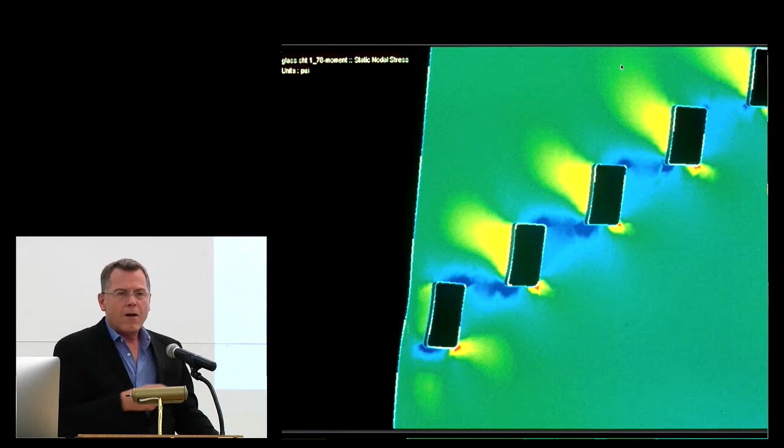Nordenson designed the stair cantilevered in stainless steel, aluminum, cables, laminated glass, and finally pushed through in his office a level of finite element analysis, the structural analysis of making this stair operate with glass as a structural member.

Guy Nordenson had a major role in a series of conferences that we organized at Columbia over these 7 years. And one of the issues that we were looking at was the relationships between very sophisticated forms of engineering and computation and the way these, on one hand, were enabling new modes of design, such as that elaborate stairway, but also the degree to which through the capitalization, the funding, and the different strata of economics within which they occur, they were relatively held in a tight province where they don't drift into the wider architectural landscape.

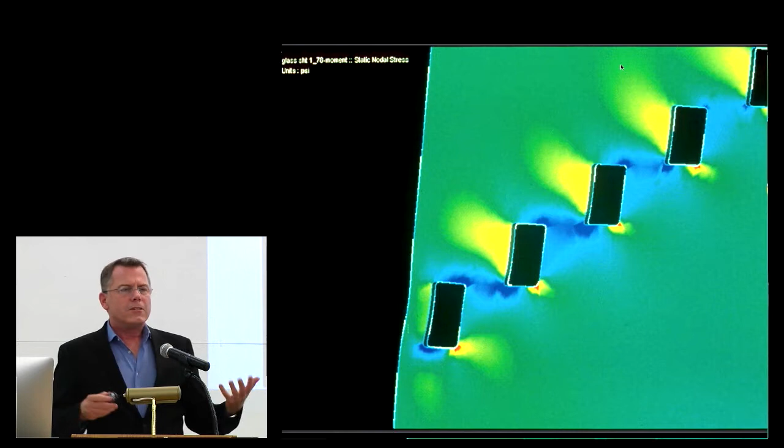In the context of Guy Nordenson's stair, the question starts to be, and I think has persisted for a long time, how does architecture and its goals that are often highly aspirational in terms of material engineering, social issues, humanitarian issues, questions of empathy, how do all of those questions as we manifest them in our relatively discrete and small practices come out into the world and through what pathways? Certainly many of us end up frustrated when we're in practice about what we believe is possible versus what actually happens.

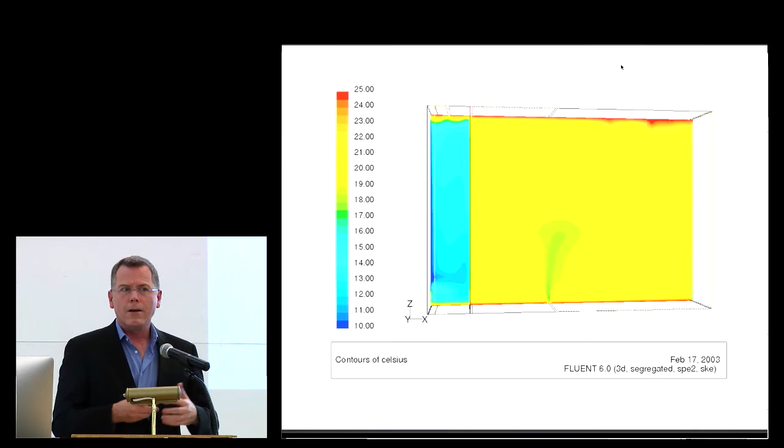What people might not realize about the Toledo Glass Pavilion is what preceded its formal design. Sejima likes to say she felt sorry in a way that people thought she was an heir to Mies van der Rohe, and that they didn't understand what was really occurring in her work, that reflection was at some level superficial and difficult to bear on her part. But what people don't know about the work is that what preceded the design, in fact, was a thermal analysis by the environmental engineer Matthias Schuler in Stuttgart and Munich.

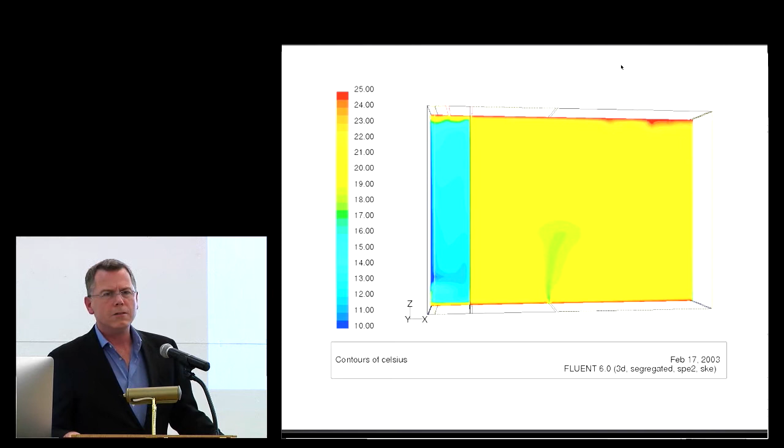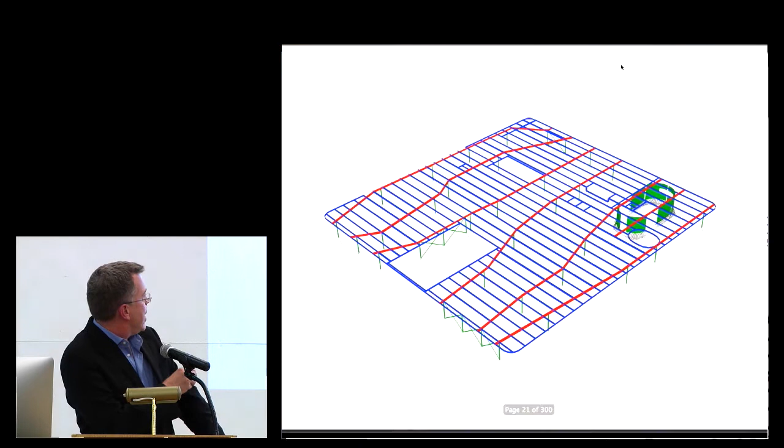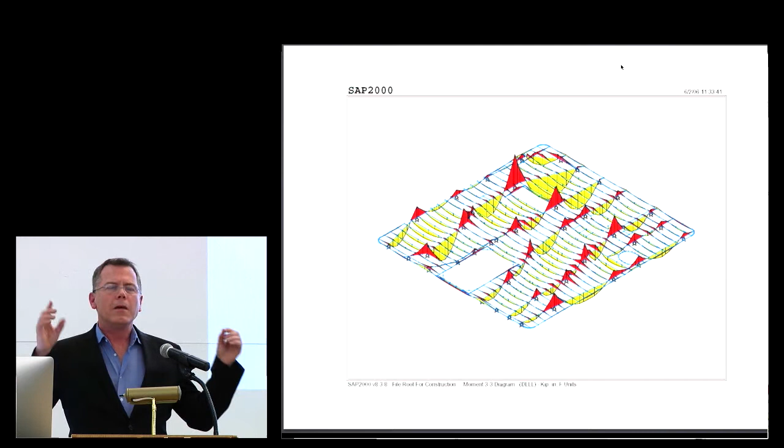Similarly, work on structure by Guy Nordenson, analyzing the deflection of beams. That is a 3D model of the roof structure. That is the stress and strain in the beams. The spans of every roof beam are different in this building because of the column structure placement. Each beam has a different deflection that is counteracted by a different camber in the beam next to it. So where you see the red, beams are pushing upwards. Where you see the yellow, they're pushing downwards.

We could go into this in great detail, but if you look at the work by SANAA during that period of time, you, on one hand, see the evidence of the building as a visual instrument. It's a glass building. It's about transparency. It looks like Mies van der Rohe at some level. It is part of a 20th century tradition of optics, visuality, seeing.

But on the other hand, as a contemporary building realized in the middle 2000s, it was also a building that was pushed through a level of computational analysis in structure, in energy, in physics, that pushes it into a completely different experiential level architecturally. Frank Gehry's IAC building was part of the first conference.

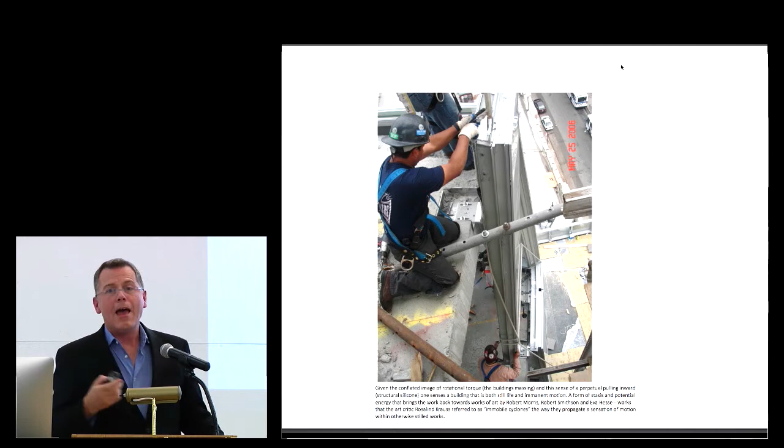What many people don't know about the IAC building is that this is not a building made of cast curved glass. The glass in the IAC building, and these are IGUs, 2 layers of glass, arrived on site flat and was actually cold bent into place. So this is an image of the glass being installed. The men are actually in a process of partially setting it up and then eventually bending it into the space to produce the curvature.

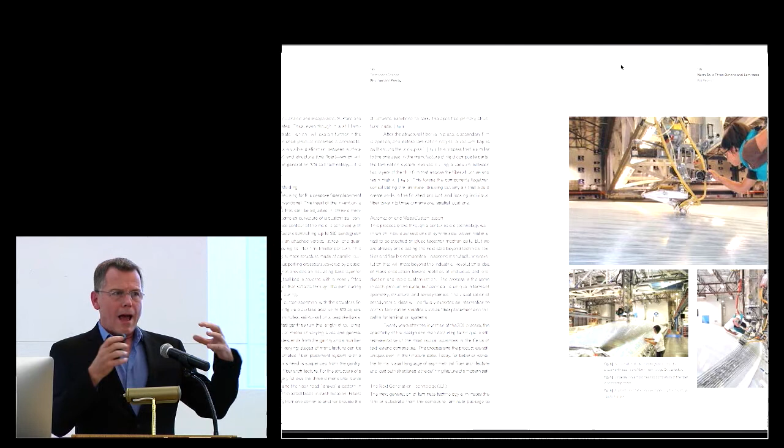Looking at these kind of things, I think a question that comes to mind is, on one hand, how do we operate as designers? When do we get access to this type of materials knowledge? When do we get access to this type of technology? Increasingly, it's embedded in relatively low-cost software where you can do these things in a classroom with relatively little training.

But at the same time, when do we begin to conceptually try to imagine the bridge between something produced in some way that's complex economically, materially, technically, and what it produces in the world, and where that lodges itself as either an expensive, high-end piece of architecture, a $100 million building on the West Side Highway in Manhattan, or a low-income house in Houston. Where is the strata, and how do these things start to come together, if they do at all? The general assumption is they don't, and I'll try to say that they're not coming together like they should.

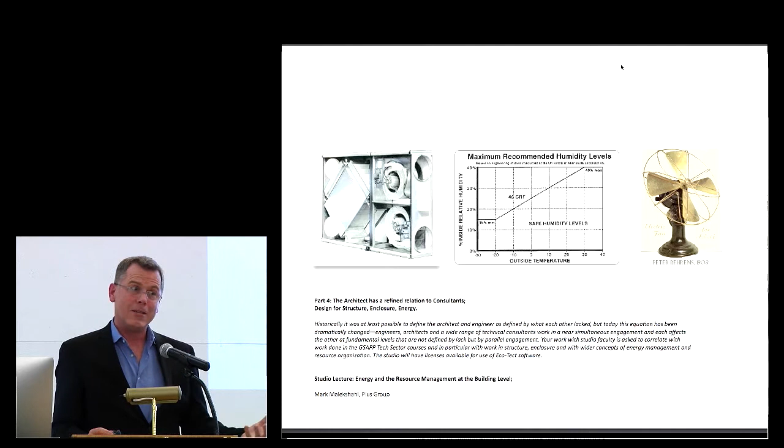Polymers, this is North Sails outside of Las Vegas, carbon fiber laced sails for America's Cup races. François Roche, based in Paris, a polymer tent. This is, I believe, in India, a polymer tent that is lifted by an ox. François, looking at the contemporary molecular aspects of the polymer versus one of the most ancient forms of humans harnessing power larger than themselves to dilate the structure and produce an architectural interior.

Now, if you look into history, you would assume that the 20th century, whatever part of it you're looking at, would have a deep relationship to architectural technologies, and of course it generally does. But the differences are worth looking at very closely and reviewing now versus 1970 versus 1940 versus 1930, different places, different times, different people.

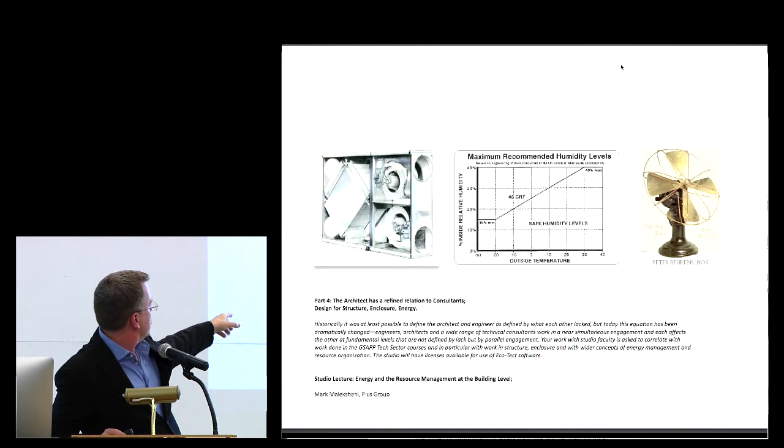In Kenneth Frampton's Critical History of Modern Architecture, actually I take that back, that's a different reference. In Frederic Schwartz's book on the Werkbund from about 10 years ago, he's discussing Peter Behrens' designs for AEG, the large industrial concern in Germany from 1880s up until today. AEG designing everything from turbines for power plants to fans for your home. Behrens, according to Frampton and Schwartz, was not concerned with how the fan worked, but with how it looked.

And if you go down that history, it's not to say that how it looks is trivial. It, in fact, becomes philosophically quite complex. But the argument is that somebody like Peter Behrens, when he was designing machines for AEG, not buildings, but machines, was interested in giving them what Schwartz calls style, and style as a quality that supersedes the commodity role. He wasn't interested in the electric motor. He wasn't interested in the copper wires. He wasn't interested in the brass versus the steel, other than in the optic quality, the argument goes.

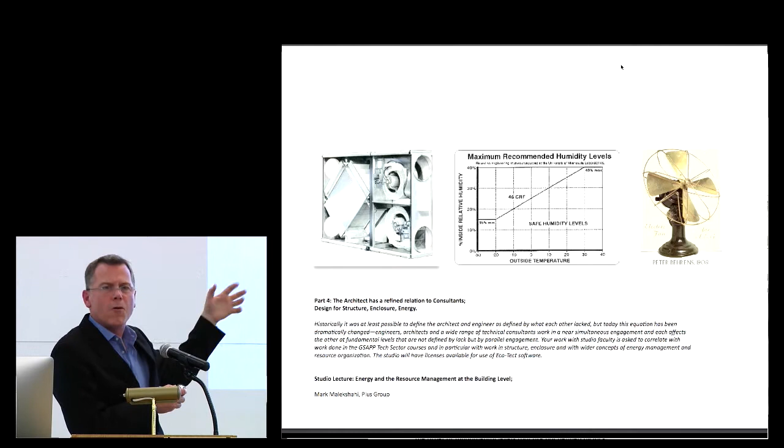Now, today, buildings have machines in them galore. This on the left is a contemporary machine. It's called an HRV. It will exchange the air in your building and replace it with air from outside. But these kind of machines have nothing to do with architectural scrutiny. We buy them, we use them, we generally install them in a place where they won't vibrate or make noise for the other rooms, but they, of course, are what make buildings possible. The Toledo Glass Pavilion has a whole slew of those in the basement to exchange the air so the building doesn't condensate.

Now, when you come to these kind of scenarios today, and I don't mean to be speaking to an audience who doesn't know this already at some level, of course, you're young, the world is modern, you will do things in a way that you wouldn't have to fight your way to this point.

You might just start at this point because you're young and you're right there already. But historically, the way in which architects gather this information and use it has been a bit of a different path. The architect comes up with a concept, a complex idea for a city, for a site, for a client, for a goal, and then after that starts to be presented and organized and under control, you begin to hire what are called consultants, people that help you solve all of these problems. And if they're great consultants, they help you refine your project, of course.

But I think what's going on today in so many of the buildings that we were looking at in the conference and series of books was that the quote-unquote consultants were there on day one, and that what was going on conceptually in the project almost required the quote-unquote consultant to help you understand something thermal, material, chemical even, before you would have the right design aspect.

Now, I'll come back to that, but my way into this was really not through materials, even though I was raised in a generation that valued tectonics and construction by various influential theorists and historians, such as Kenneth Frampton. But I came at it really through housing. And this is kind of tying into Eric's introduction.

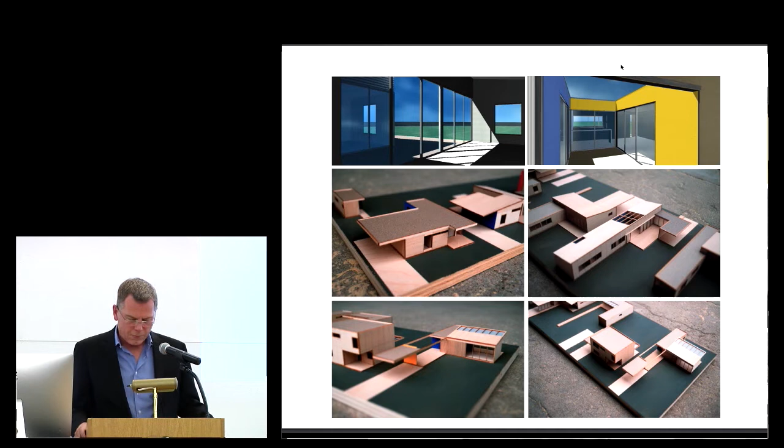So 16 architects ended up being invited to design a house for the Fifth Ward Community Redevelopment Corporation, who had been building the house I showed you a moment ago, very successfully, helping a lot of families get settled and become property owners. But they were interested in exploring it, and they also felt as if it needed to be explored. The architects were given a dossier of information, many pieces of information, but 3 large pieces of data were right at the front of everything. And they began to work.

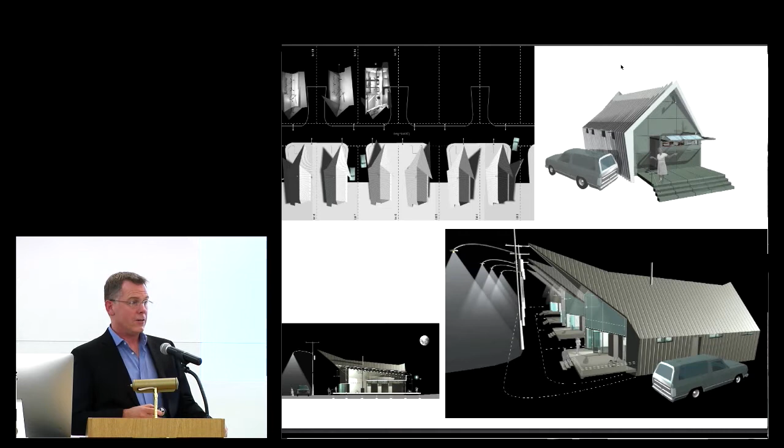Sze Tsung Leong and Judy Chung producing a house that could be assembled, taken apart, and reconfigured over time. Lindy Roy, again, this is 1998, designing a house that actually used the street light to gather light, trying to covet the infrastructure. Her house is a type of lampshade that's capturing the street light. Flow-through ventilation, prefabricated, a whole set of innovative ideas, but a kind of humorous and also serious idea at the same time of what if the house could borrow the qualities of the city-owned infrastructure and you could tap into that type of wealth. So a kind of caricature of that, the lower image showing that.

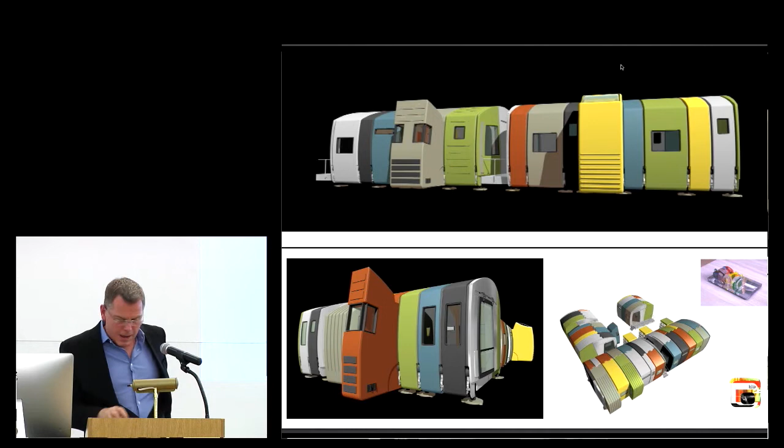Mark Wamble, Dawn Finley, known as Interloop Architects. I'll explain this in depth in a moment. And then my own participation in a house called Glass House at 2 Degrees, which I'll also explain in a moment. Now, I had mentioned 3 pieces of data.

Houston was a potential recipient of large assistance. Houston in the middle 1990s had a very depressed downtown sector. It's called the Inner Loop. Houston is a classic case of all of the wealth moving to the edges and the production of a sprawling city where the real work is on the perimeter. The crash in the oil markets in the 1980s left Houston's center very devastated. By the middle 90s, it had still not recovered. Today, it's largely recovered with quite a bit of housing once the property values dropped low enough to be redeveloped as housing.

But at that point in time, the way in which a city, and still today, would receive aid at the federal level for something like housing was in the form of what are called block grants. And it means that monies that are at the federal level, $100 million, $1 billion, whatever the number is, they are broken down and redistributed to either states or to different levels of municipal government in the form of what are called block grants. The intention is to break down the monolithic structure of the government subsidy and to mobilize it through more local and theoretically more capable agencies.

So instead of the federal government telling Houston what to do, it moves some money to Houston, and then Houston determines what to do. Teaching at Berkeley, Jennifer Wolch and Michael Dear, the dean and a professor of city planning, formerly geographers at USC. In their early research, they argued that by doing that, moving money from the federal level to the local level sounds like a great idea. But in the case of lower income constituencies, it means that you're moving the money to a place that doesn't necessarily have the infrastructure to actually best use the money. You give the liberty of determining the future of the money, but you also lack the tools.

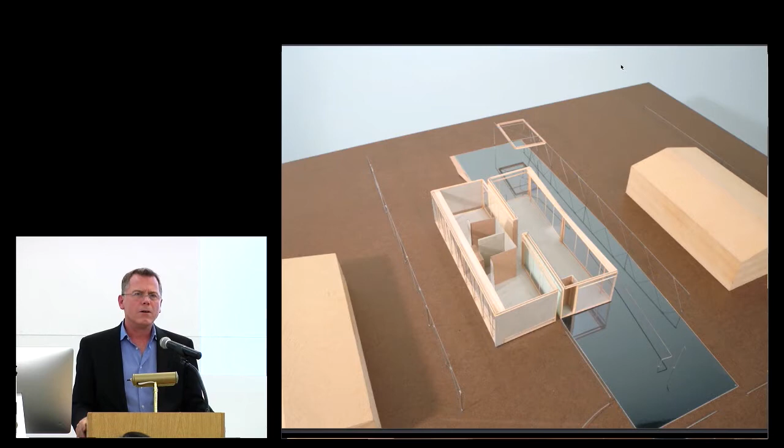What happened over the period of 10 years that I was involved in this work, they couldn't identify 25,000 households because they didn't have the apparatus to find the people who could qualify. So in other words, the Jennifer Wolch and Michael Dear argument kind of proved true in the sense that the money was there, but the instruments to actually locate the people who could use it were not. That is not to say there weren't sincere and profound attempts to do so.

So in that period of time, what sprung up was a handful of quite effective low-income housing developers, nonprofits. What also sprung up was a set of specialists within banks who were intended to find constituents and help identify people that could benefit from this, and then a set of interlocutors who would bring it together. There were literally, during that period of time in the 90s, tents assembled in empty parking lots to have housing fairs where you would have a bank, a developer, and then people that would bring you together and say, you know, you could have a house instead of renting an apartment.

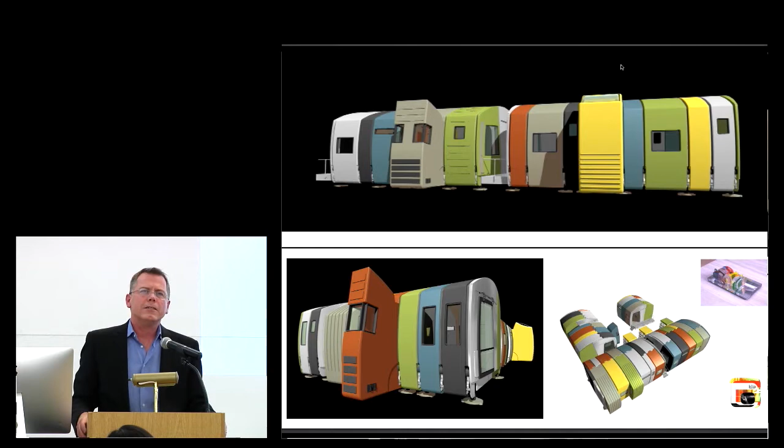In that context, the $225 million was often seen as a big number. In the context of Houston's budget in 1998, everybody worked with numbers then, and we still often do, of course, within schools of architecture. The city had commissioned about $1.4 billion in freeways. One 8-mile stretch of freeway cost $181 million that year. So $225 million as a large municipal number is, of course, tiny. Freeways produce wealth, housing produces wealth differently, so it's, of course, not a fair comparison. But you keep going and trying to contextualize the value of that money as an aggregate sum versus a disaggregate sum. The drive at the federal level was, and still often is, to help people buy or to subsidize rent rather than to actually build buildings.

If you bought a house in the 5th Ward for $52,000 with a $9,500 voucher, your mortgage of about $40,000 would be about $350 a month. At 9 years, which is the average tenancy for Texas housing, you would have spent $36,000 to accrue about $4,000 in equity. In the amortization of loans in the United States and elsewhere, you don't accrue equity until you are well into the terms of the loans. And of course, in the American housing market, many, many people, in fact, don't keep housing to any long term, and they, in fact, never accrue the equity because of the amortization process.

And then finally, the question of architects. This is the big question, and this goes all the way back to the beginning. And I'll try to wrap up a theory here and just present work.

When you build housing in this manner, and I'm going to flip all the way back to this image, like that, there's no architect. There's no engineer. 347 houses built on the outskirts of Houston as a development that same year, $14 million worth of construction. The architectural fee was $4,550. $12 per house, 0.0028%. Not 15, not Frank Gehry 50, 0.0028%. There is no architectural fee in speculative market-based housing in most places in the world, especially when it's low density.

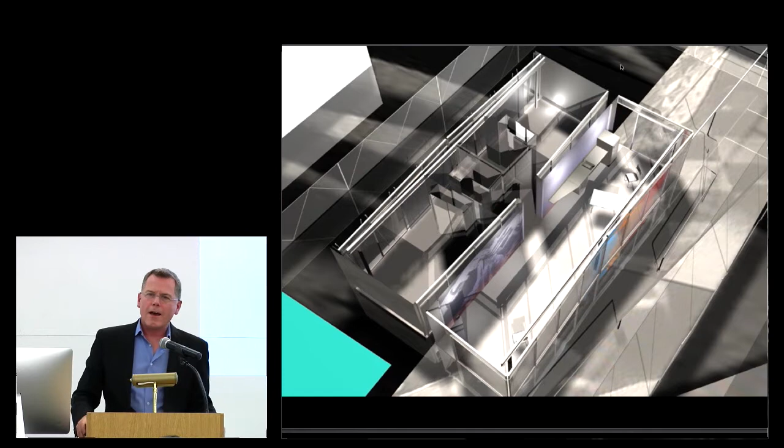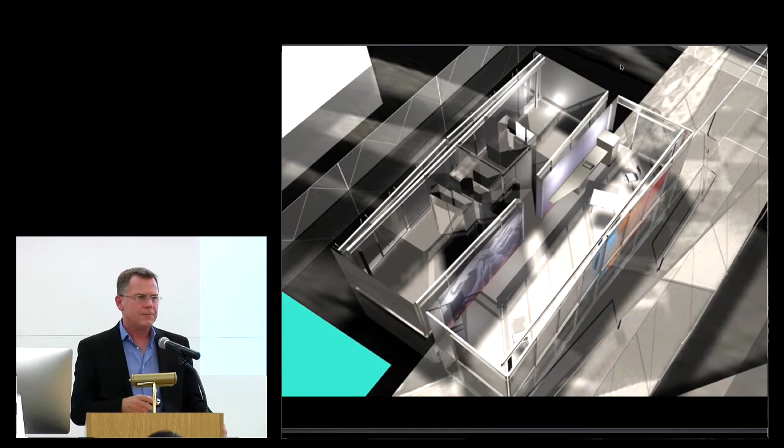My project was called Glass House at 2 Degrees. I was trying to implicate early modernism back into this question, but doing it at the scale of the house. But it was made of off-the-shelf, 20-foot long, 9-foot tall Fleetwood sliding glass doors that were coupled together in a little folded diaphragm that would produce the shear stiffness in the building, but would be coupled together with just about 6 custom parts. So it was at some level saying, let's take the commodity processes that already exist, let's use a moderated form of hand assembly and come up with a new project that is somehow a commentary on the past. And I could explain that at length, but I really want to talk about the whole point of housing at that point in time.

So putting those two things together, conferences, books, research done in 2007 to 2014 versus housing transformations in 1996 to about 1998 based on transformations all the way back to the 80s. A bit odd, but it's to say that something that is occurring at the legal, financial, governmental, socio-political level versus something that's occurring squarely within the province of what we call our careers, architecture, engineering, materials, collaboration. How do all those things come together? And of course, they always have come together in our professional practice, but the tables are always moving beneath us.

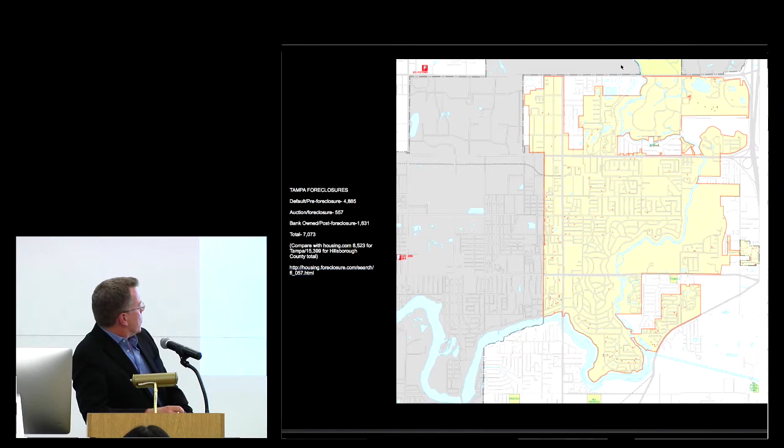That's 364 foreclosures in Temple Terrace, which is a lot of foreclosures. If you went back to 1964, you would not have that kind of foreclosure ratio anywhere. That's the foreclosures in Temple Terrace, little dots. When you come across the border into Tampa, which is right here, and heading towards downtown Tampa, foreclosures rise a great deal. That's another way of modeling it.

The foreclosures rise precipitously. Temple Terrace, 1/3 the size of Manhattan, 5.5 Central Parks, and what it looks like. Pretty normal, right? Looks like Orinda. No, Orinda looks better than that. Looks like Gardena. Is it Gardena, California? Gardena. So, I love the suburbs, actually. I don't live in the suburbs right now, but I don't dislike them.

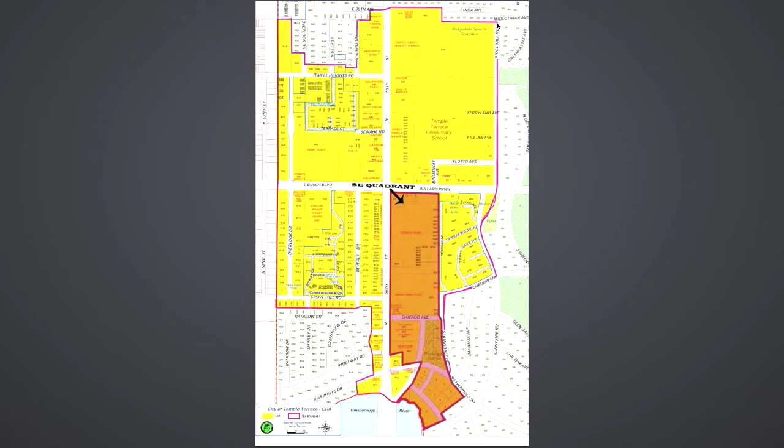I think they're fascinating. Temple Terrace was a typical town, and I should say is a typical town in terms of zoning. That's retail and commercial around its perimeter, major intersections, of course. The middle is where the very low density housing is, all one stories. This is 225 acres of property that the city was set to acquire for about $80 million through a tax revenue that they had put in place in 2006.

The goal was to raise the taxes minimally on the residents, buy the 225 acres from private development, turn it back over to private development at a highly subsidized price to create a new downtown that would not have much housing, but would have hotels, offices, and retail, all better for the tax base than housing, and to recreate its southwest border with Tampa. Tampa had, and this is the beginning of that, and you can read the kind of blogs. I wish they would put their money to better use, like build a wall around us to keep the thugs out.

Temple Terrace, little idyllic community that never quite takes off, but tries very hard to remain that, tried to wall itself off from Tampa for 40 years. And what we ended up proposing was that, instead of walling itself off, which is of course problematic, it could get involved with reconstructing its border with Tampa. And the way we came to that, and I'll describe it in some detail, was that if the Buell hypothesis was looking for a new public housing, we weren't likely to get it.

But if we could look at the larger economic analysis of the cities, and in particular the border between the two cities, we might be able to imagine a new spatialization of those two economies and something like public housing in the sense that it would be governmental monies used to recreate a social housing situation, but to do it differently. So in looking at growth, Temple Terrace had tried not to grow. It needed to grow, but it had resisted growing. Tampa had grown explosively over the last 50 and 60 years.

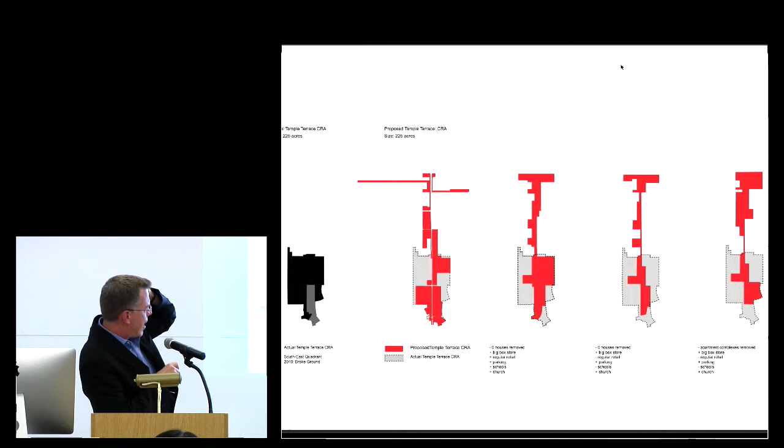This is the original 225 acres. From left to right, we were reallocating that same acreage into different footprints and looking at what could happen. What if you fit it between houses? What if you use the setbacks? What if you use forms of public space, such as 200-foot setbacks, which are the regulation in this city, but not actually demolish what's there, just reoccupy the setback, so it is a public instrument. And then that's the 200 feet between the storefronts and the street.

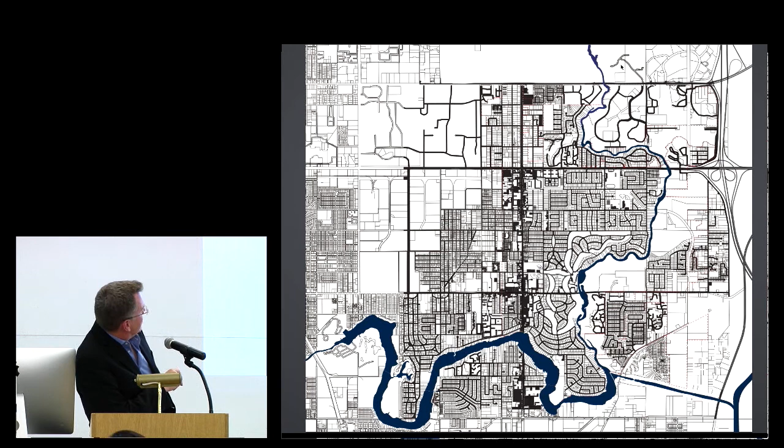We went through normative planning circumstances. What's the average household income? $50,943. Where does it go? Food, beverage, meat, dairy, housing, shelter, car insurance, gas. Where in that budget could you find money? But that is all analysis at the level of somebody's income and expenditures. It's accepting that those incomes are stagnant and that those expenditures are based on other people's prices, meaning the price of fuel.

The breakthrough came in this public realm when the economic people that were helping, I could do a little bit of that myself from studying these things for years, but I brought in some real experts. I said, well, can somebody figure out what is the aggregate personal income of this little town in a year? So the answer came back, $714 million. So 22,000 people, $714 million. It's not a hard number to figure out. You multiply the population by the average household income. But $714 million. What is the aggregate value of the buildings in this town on the tax rolls?

$1.15 billion. We then took the city's budget for police, sewers, trash, electricity, and we modeled it in Excel because it's a relatively small town. A huge amount of American cities are this size. And then we started trying to understand what would happen to all of the tax revenues if we adjusted the FAR. Very simple kind of parametric modeling.

But what it led to was a hypothesis that we could argue that the city could keep the property that it had purchased and that it could create a new economic vehicle to hold the property, and that because the city had a low debt ratio at the city level, the personal household situation was more precarious than the city's situation, that it could create a new vehicle that would use its balance to underwrite a new form of housing that would be better suited to the actual needs of the constituency.

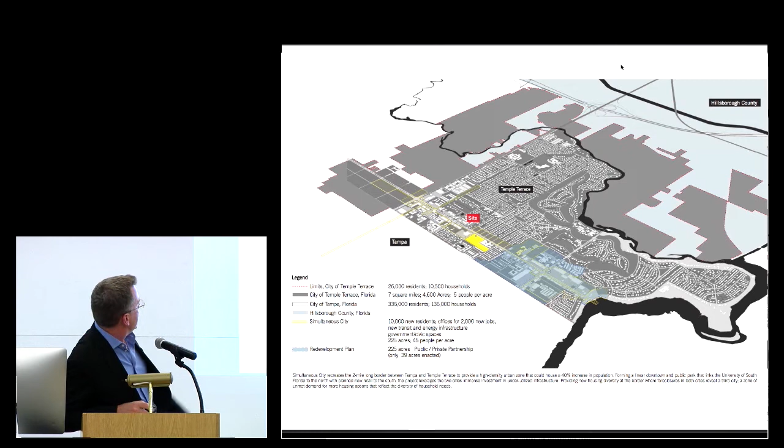But we, one day, demoralized, just did a little Rhino model of the entire city, then we made a physical model of the entire city. But all of that was along the way of beginning to try to simultaneously understand it, formally, materially, economically. In the end, we wanted to know the city better than the mayor did and the economists.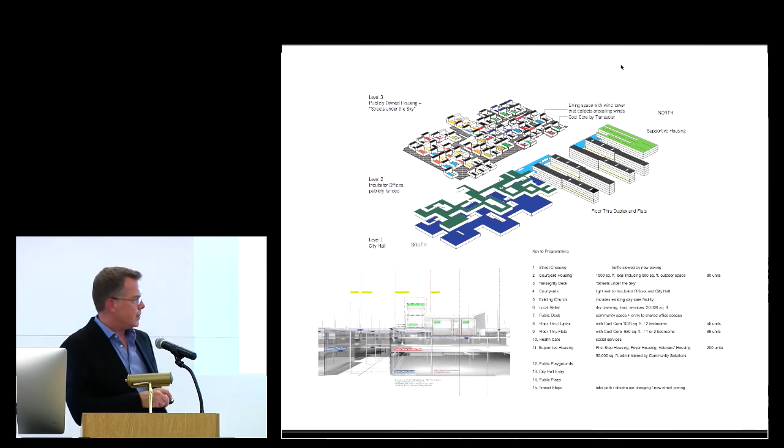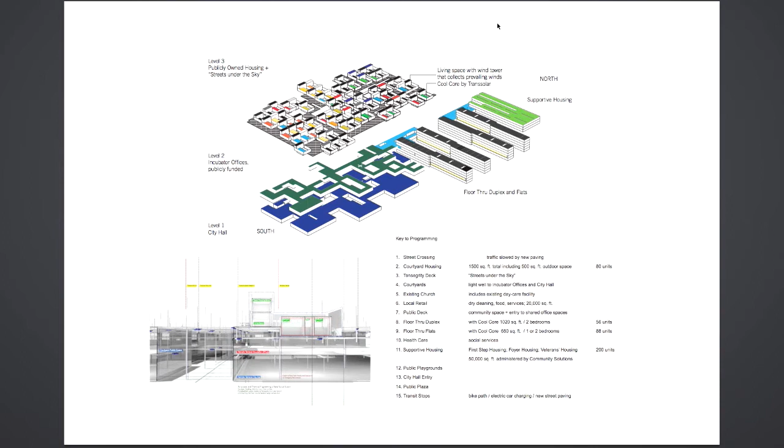So we ended up proposing that 225 acres would be spread across the whole border of the city and rebuild the border without taking anything down. We would add 10,000 new residents, and we would then produce an architecture in that realm. In our case, we took 14 of the 225 acres, and produced a model for what we might do as architects, which we did and presented.

But the argument was that in that zone, you could re-aggregate the monies and try to find a way in which architecture, even though it's coming from highly centralized funding streams, is producing a complex, heterogeneous architecture that appeals back to the sensibilities of why people want their own house in the first place. I never would have thought this way without having gone through the work in Houston and a few other projects in between.

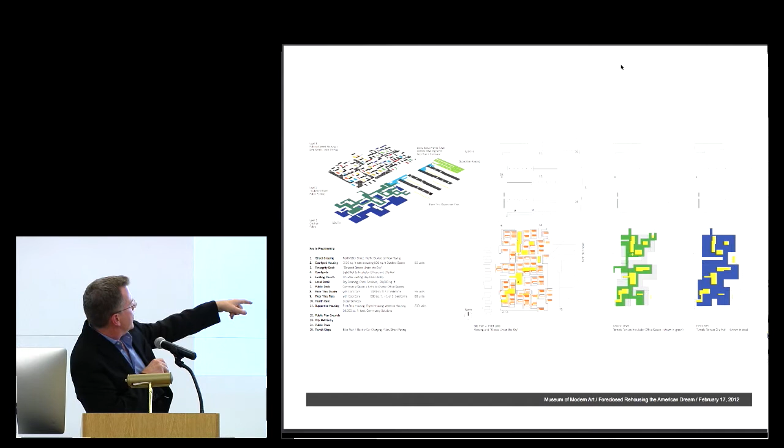So the publicness, we finally did something serious but also a little bit bold and maybe a little ridiculous at one point. We proposed putting new housing on top of a new city hall. And what you're seeing in blue is the new city hall. Floor number 2 in green is a new incubator office. Floor number 3 was 80 new, smaller, 1,500 square foot courtyard houses with 1,000 square foot interiors, all of which were layered and developed with something Transsolar developed with us. It's called a cool core. Only one part of the building was fully air conditioned.

That's the dwelling. This is the dwelling. That's dwelling, incubator office, new city hall. And the living spaces were heated and cooled in layers. This is a sketch from Matthias Schuler about layers; he called them comfort layers, summer comfort layers, winter.

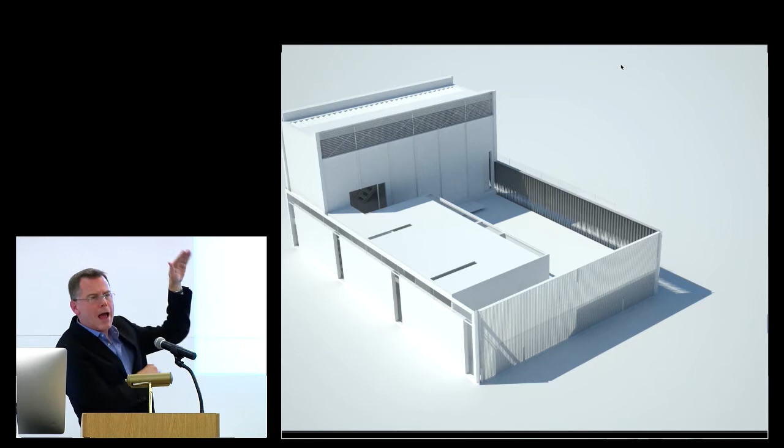And then that manifests itself with a living space that was tall, harvesting the prevailing winds for dehumidification. The bedroom units suppressed in that lower L that were halfway into the offices. An exterior courtyard, which extends your living space privately. This is a plan of that, early plan.

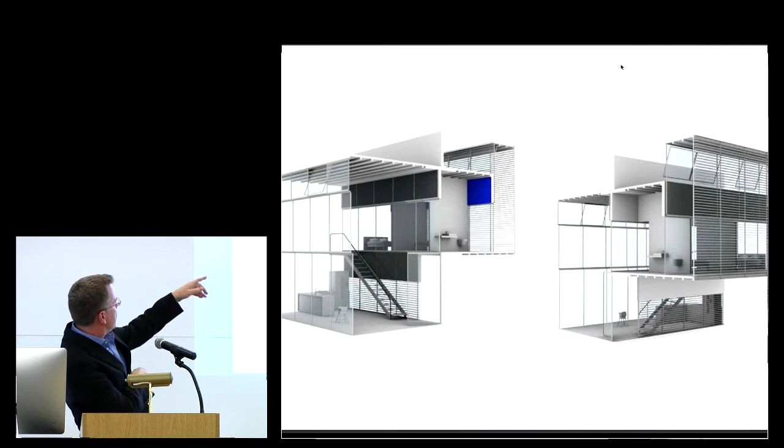Another unit developed with Transsolar was open quite extensively in the vertical planes, but used a chimney effect and brought cool air from the north side up through the south side and out a chimney, and hybridized environmental planning and structural engineering into a social structure. These are concrete T's that balance the building structurally, but also produce the comfort layers.

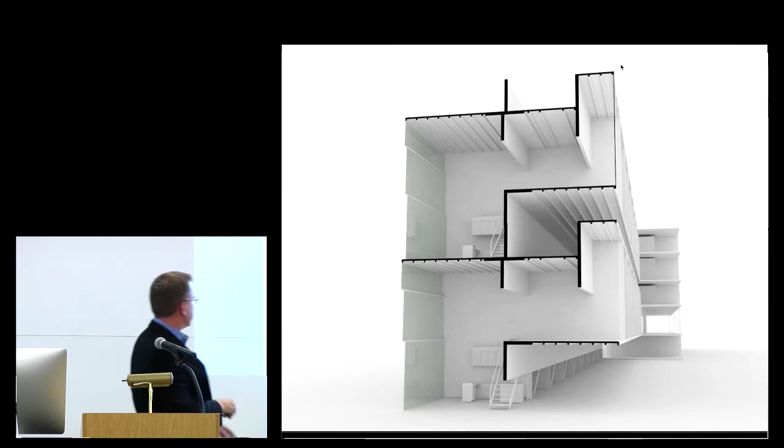So it works itself out like this as an early sketch, if you want to see that. So this is the north side, the south side. The bedrooms were in the middle, the chimney effect and a solarium, harvesting the heat in the winter and shedding it in the summer, but completely developed simultaneously as structure and as environment and as a social program and a smaller unit. And these are early sketches. So it ends up in the final plan.

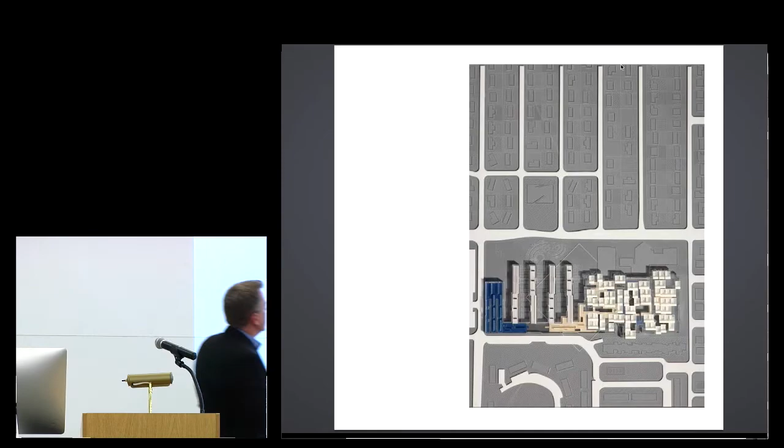This is 14 acres built around an existing school and church, courtyard houses, floor-through units, finally supportive housing, and then a whole hybridization. As an economic model, it's not necessarily an easy sell because the housing is economically hybridized with offices and is economically hybridized with the government building.

Transsolar does not believe that in the future we will ever be as comfortable as we are now. We simply can't afford it. And we don't have enough technology to make it possible either. So we will eventually get those numbers down, but we will also have to learn how to be different in terms of what we expect. So Matthias was proposing extreme behavior modification.

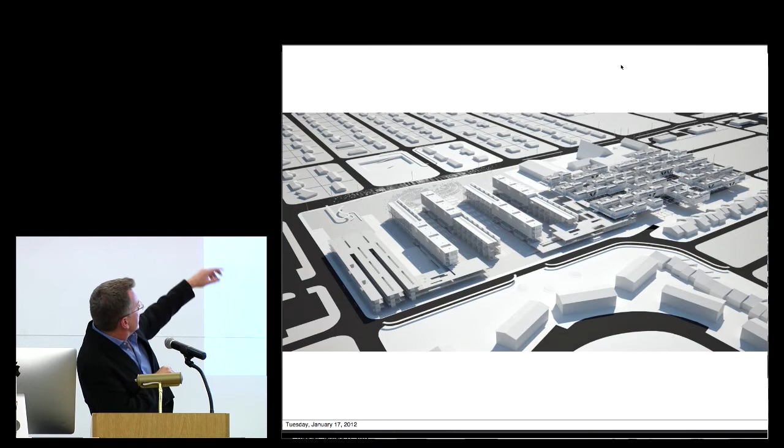A little diagram early on. It looks like architecture school right there, I'd say. And then how it manifests itself in the city. Those are the single-family houses in our development. There's the church. The courtyard houses are tight together, but they open to the sky. They have their own little yard and courtyard.

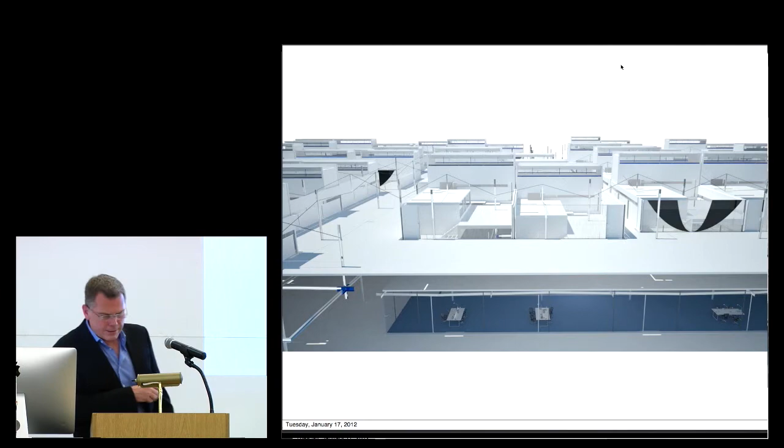You enter into a skywalk and you move through the maze down the outdoor walkway to your unit. You can eventually come across and drop down into the retail space and move into the offices and a set of courtyards that link it all together. So daylighting was taken care of through that. The structural system is an adaptation of a Snelson tensegrity structure. I'll show you a detail of that.

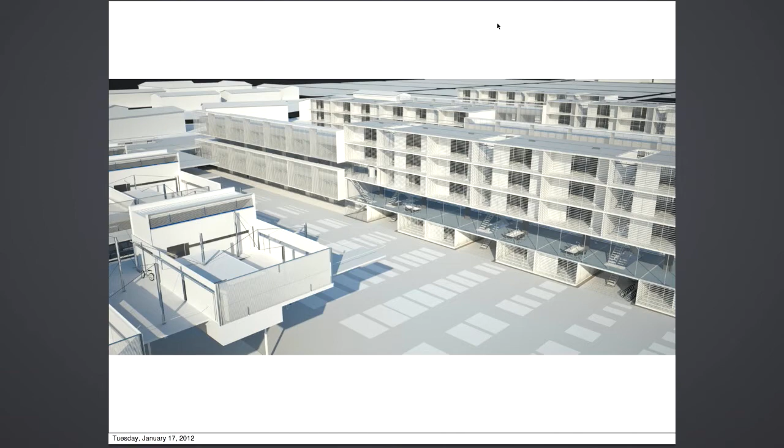So it's a weaving cable using small wide flanges in compression and sometimes in tension that produces a stability as a diaphragm cable. The buildings, the little houses, are made of fiber reinforced concrete. Their weight manifest in the tension structure produces the ballast that produces the tension and stabilizes that whole structure as a plane. We developed that, and Zak Kostura at Arup, one of my partners on many projects, did some engineering to help us make sure it could work.

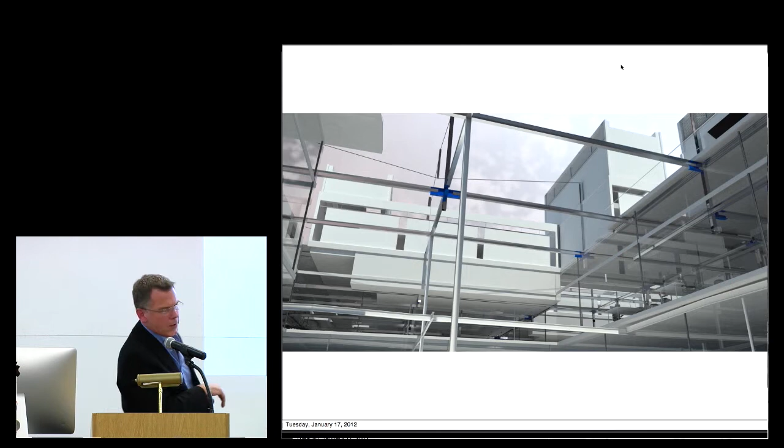But you can see the blue section there. The wide flanges are coming together in these junctions. The cables are weaving through in a tensegrity fashion, and the cables are, of course, always in tension, but sometimes the wide flanges are in tension, sometimes they're in compression. The buildings drop into that as a net, and you can see the bedroom here dropping.

This is the pedestrian level. The bedroom then drops into the office and then rises back up. The housing is a thermal blanket for the offices during the day, and at night the housing should harvest the heat from the office.

And that is a Tea Party rally aftermath. It is Florida.

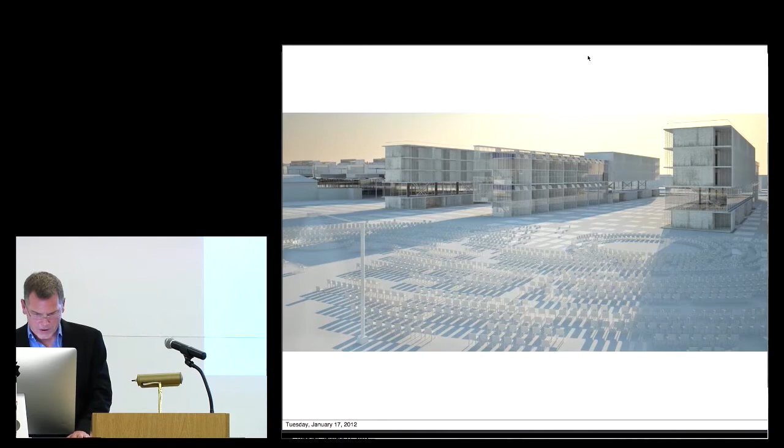The gentleman told me I would find the video very easily. That's right there. Got it. And full screen, right? Yeah, perfect.

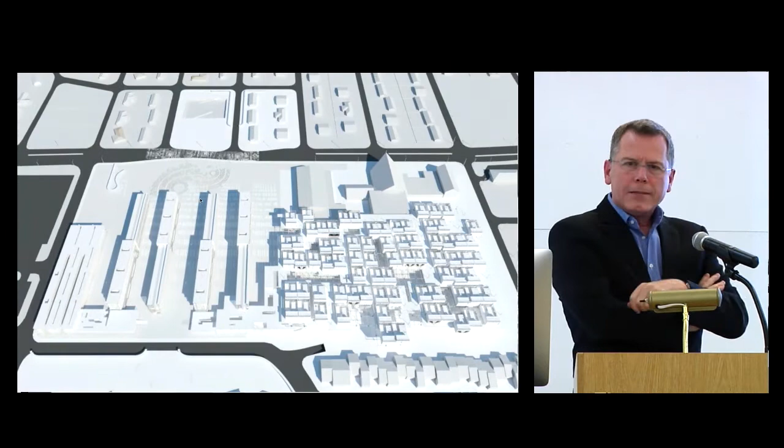Now, this gets back to the other side of the equation. The teams were given 25 feet of wall space and 20 square feet of model space, some kind of basic denominator. At one point, in a very serious and lofty way, the MoMA really wanted the evidence. They wanted to not see the analysis, wanted to see what you produce architecturally.

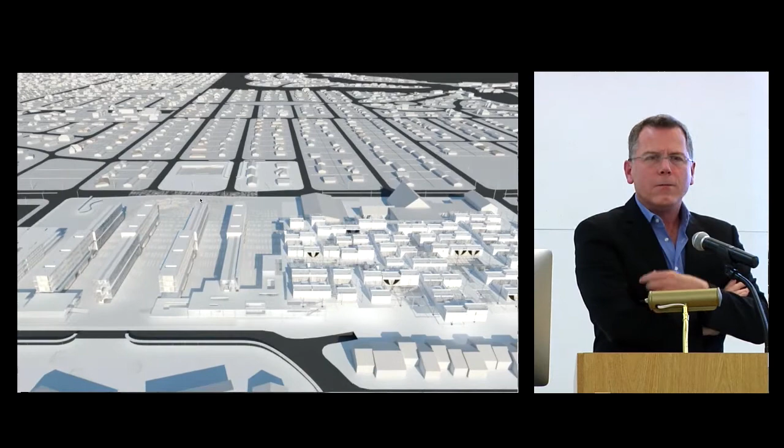At one point, Barry Bergdoll, who was the chief curator, published that Excel diagram in the catalog. It's the first time an Excel diagram, I think, ever got published by MoMA. And it looked a little like Mondrian, I think. But Barry very much was compelled by that and supportive.

But another time, there was a kind of statement, like, we don't want to see any more Excel diagrams from you five architects. We want to see architecture. And there was a legitimate frustration that the economic and other forms of activism were not necessarily the same thing as architecture, right? So on the walls, we really showed the evidence, and then we all produced a set of videos in various ways to try to show the research.

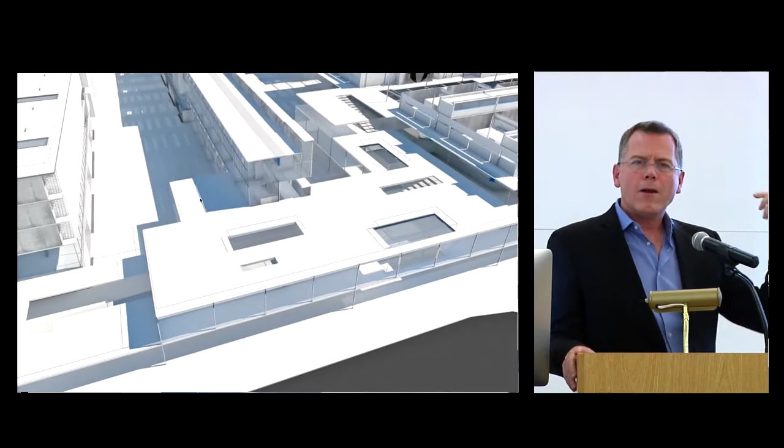So this was a video that was about showing the experience of being there. There's another video that I won't show that was on a smaller screen that was showing all of that research. And then finally, the MoMA did interviews with the architects where they got to verbally explain what was going on.

But the reception of the show publicly was, I would argue, quite rocky. When you deal with the suburbs, you of course are going to hit all sorts of touchy subjects. But that divide between discussing all of the complexity versus the actual result was huge. And I think all the teams suffered from that in the media. Not to mention, I think the MoMA suffered from it in the media, despite bringing people to listen constantly. So, this video was trying to get at the feel of it.

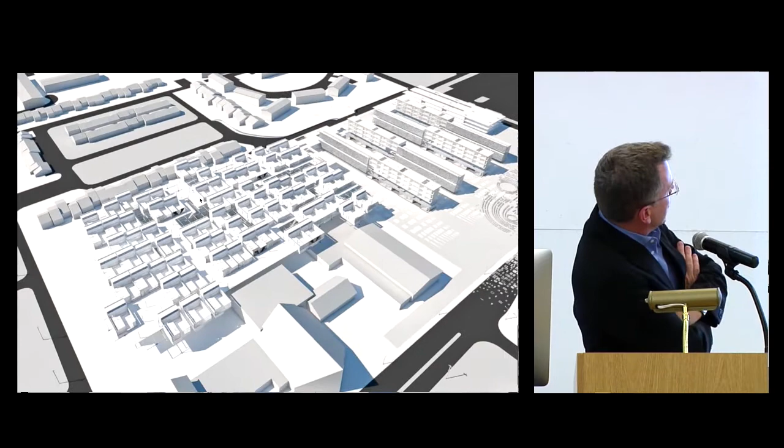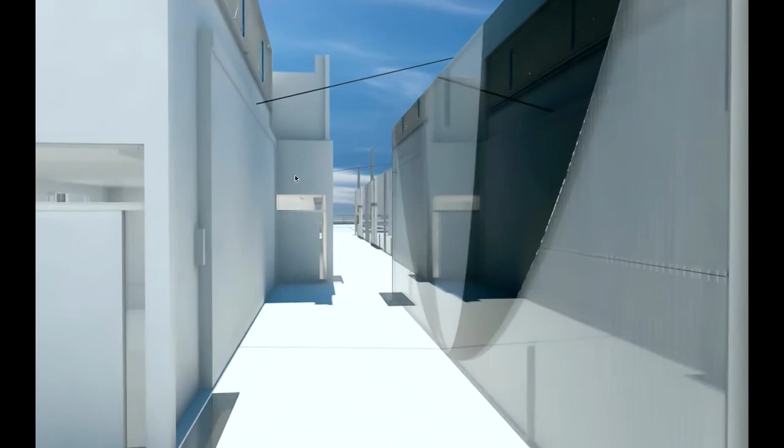So you've gotten off the elevator and you're outside. You go down the Venice-like streets and head towards your unit. That catenary shape is a steel plate that's part of the stiffening diaphragm to make the unit itself a structural member. You see the cables piercing the buildings there. So in a tensegrity structure, that little I-beam right there, that's in compression. But this one is in tension.

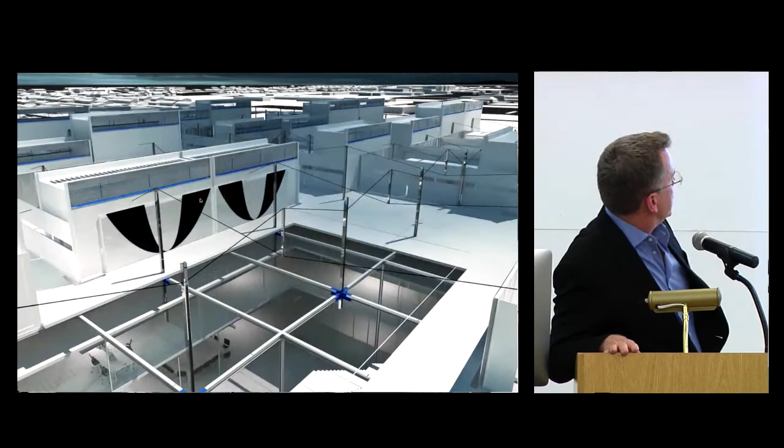So you see the dropping down into the courtyard. There's the mayor of Portlandia. If it were Portland, he would be sitting there having a meeting at his round table with Carrie and whoever the other guy in Portlandia is. South Florida thunderstorm. There's music to this, but I'm not showing it.

And then I always tell people I know nothing about cinema other than what the average architect knows, but we worked very hard on the camera here. The camera is rising, it's following a spline, and it's also rotating as it's rising, bringing you as the viewer right through the cable net and then finally above to see the relationship between the building and the neighborhood.

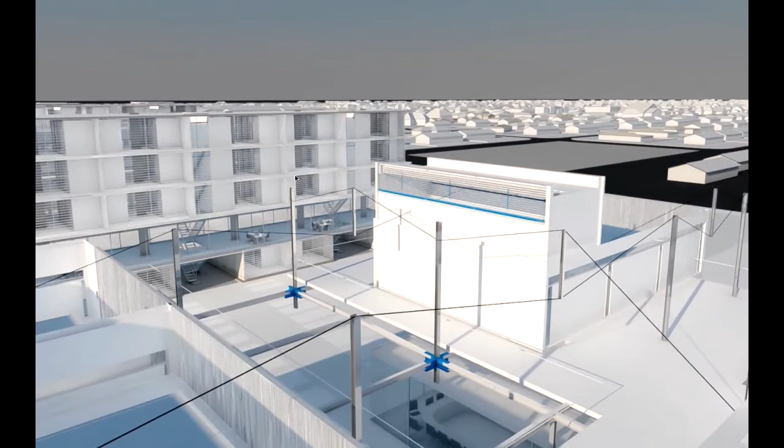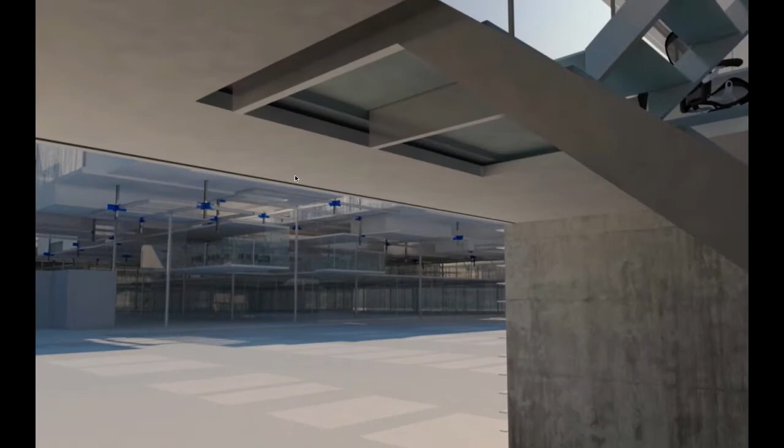And this, you're looking up at an office space that's embedded into the housing. One stair goes to the apartments, one goes to the offices. And you are about to be blinded by the South Florida sun as you come underneath the shade. Look west, get blinded and barely see into the office.

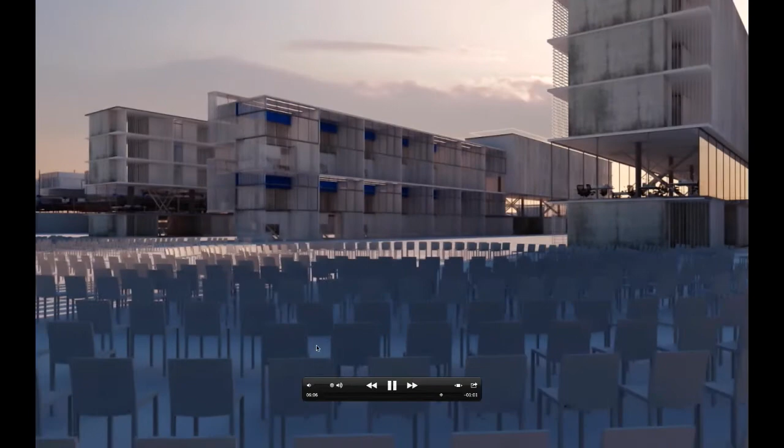There's a strong interest in pushing this thing at some level not to deny the climate and the sun and the light, but to make it possible to get shade from it while you, of course, could see it as well. So. This is the end of the day.

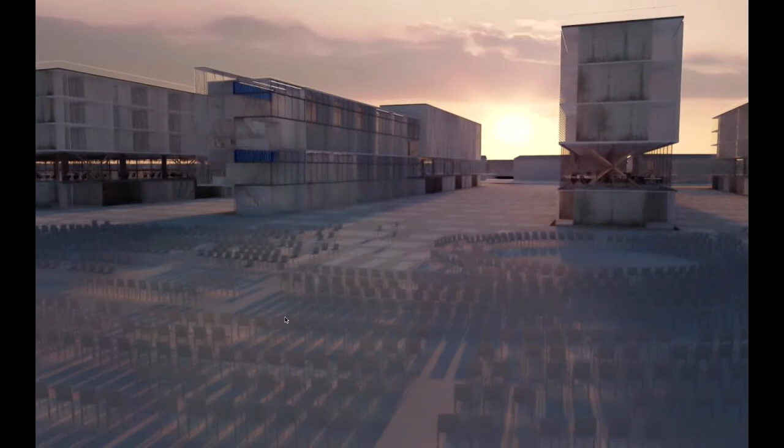As a... to go to full screen. So the model.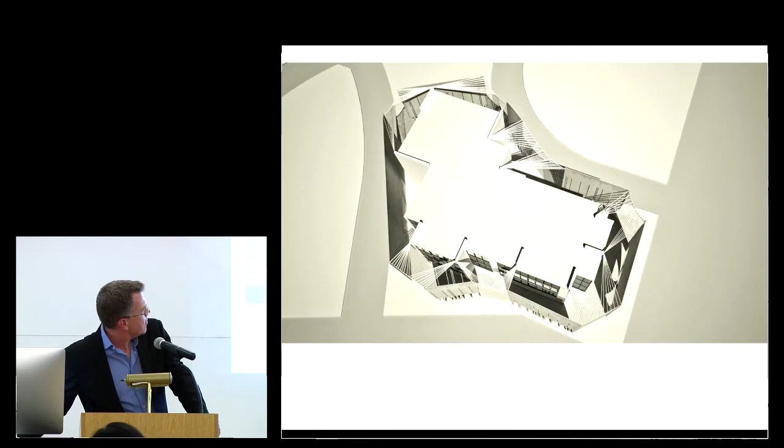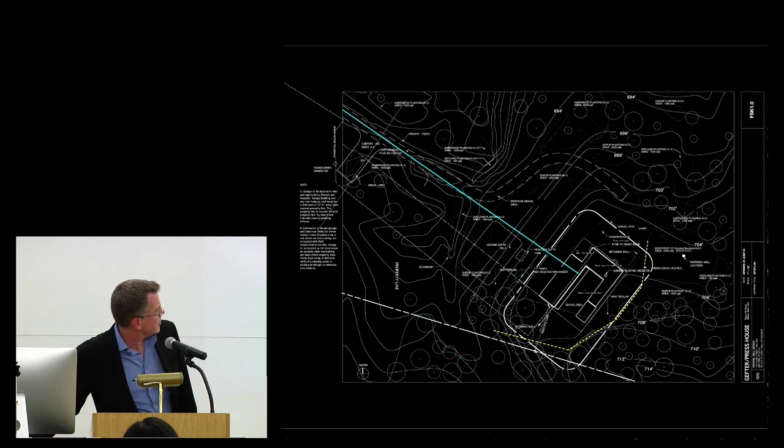And they were basically the type of client that knows you, challenges you, and knows history, and had purchased 12 acres of land in upstate New York. That's their house in the middle of a forest. They owned 12 acres of that forest. And we proceeded to design a house that was a kind of optic vision machine.

This was in construction as we were beginning work on the glass conference at Columbia, and it was when we were getting to know Kazuyo Sejima and her team. And part of what made that conference so palpable was living through trying to produce a glass building myself, but also understanding the difference between how this was engineered versus Toledo and feeling the difference, how it was really affecting everything in the building.

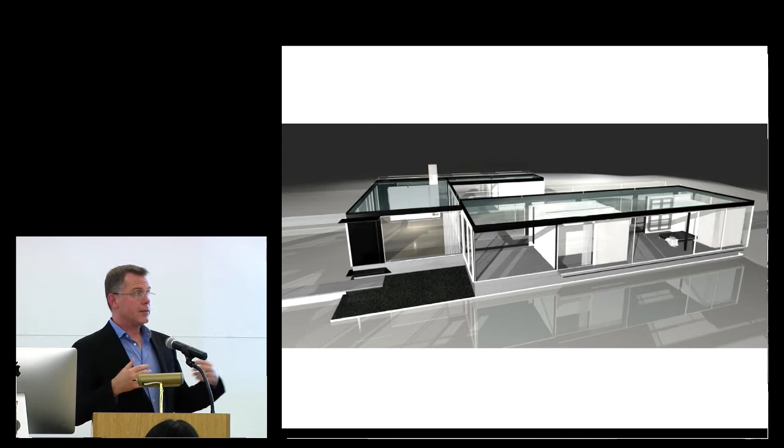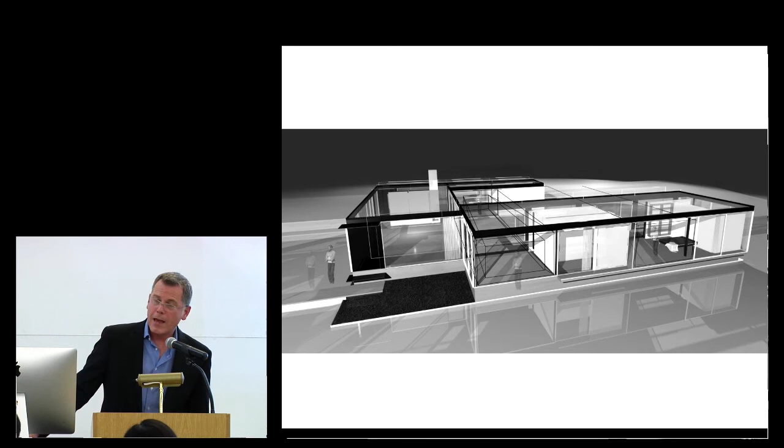We had very sophisticated engineers, Robert Silman and Nat Oppenheimer on structural, Andy Sebor, he was the mechanical engineer of the Getty, Altieri Sebor Wieber, doing that building. He took on this little house. The contractor had built a house for Steven Holl right before this. And we went through this series of projects where they challenged me to take work that I had done in previous iterations and reinvent it with some criticism and insight from the clients.

And it turned into a courtyard house that, and I'm not going to go into any detail today because the lecture is too long, but a courtyard house that was an ocular machine of sorts, but that was also based on using very, very large sheets of glass. These were 9-foot tall by 14-foot wide IGUs. It was made by a company called Rochester Glass. They were able to produce the largest single lights of glass in the country at the time. Maybe somebody else can now.

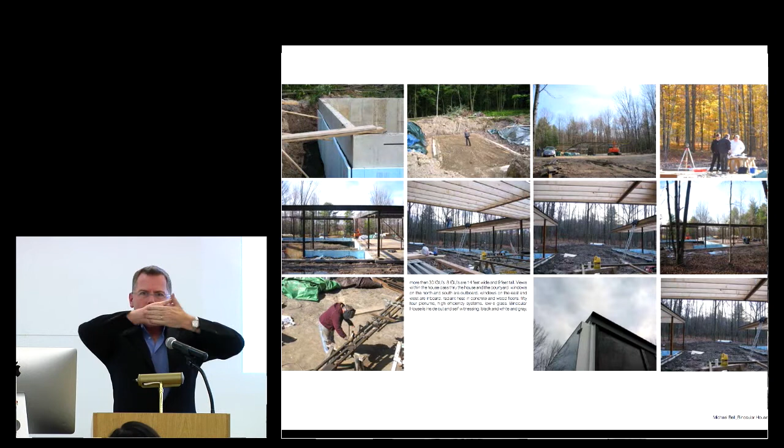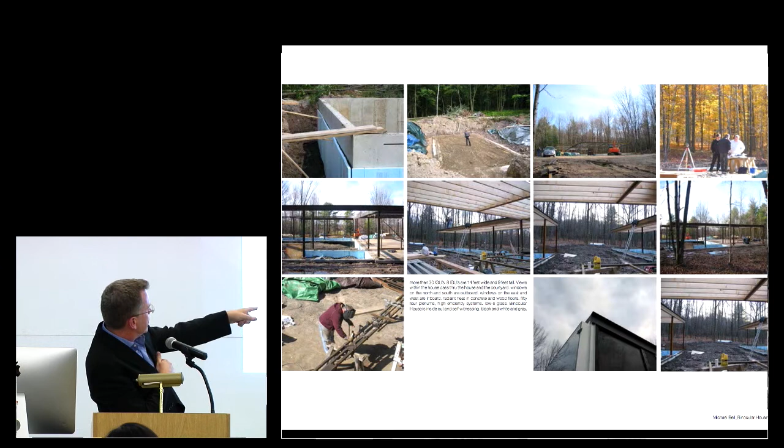We were pushing for the flatness of the glass, the planarity of the glass, the transparency of the glass, but using the glass as a quasi-diaphragm to stiffen the skeletal structure of the building. So the glazing is discrete from the structural frame, but it's held by structural silicone, 5/8 inch structural silicone joints around the perimeter, enough for everything to flex without breaking a light, but nonetheless bringing it all tight into the structural frame and super flush.

So there's no public housing here. There's no city economy. And all of those questions that were deep in my psyche at that point in time, I switched back to being an architect, with a client who was just amazing and a builder who was amazing. This is all largely built on site by Mitchell Rabideau.

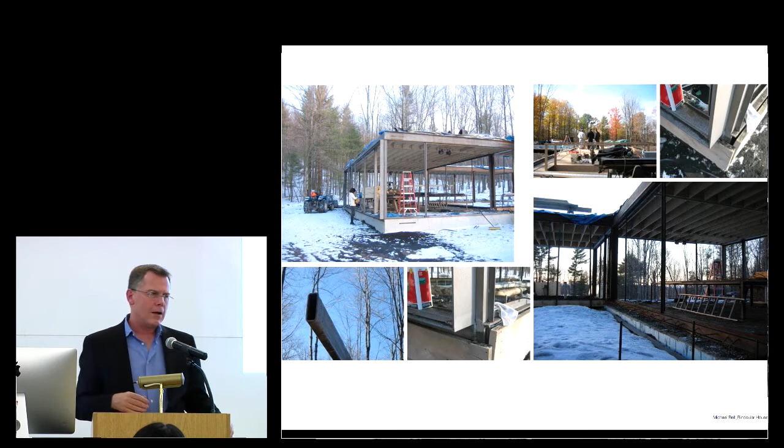The steel was delivered to the site. He built a shed and he hand cut the steel on the site, welded it on the site, sandblasted it, cleaned it with solvent, primed it, painted it. Things that would normally happen in a shop, this all happened right there locally. And so you can see the sandblasted steel here at the bottom and the can of solvent. There's a piece of tube steel cut.

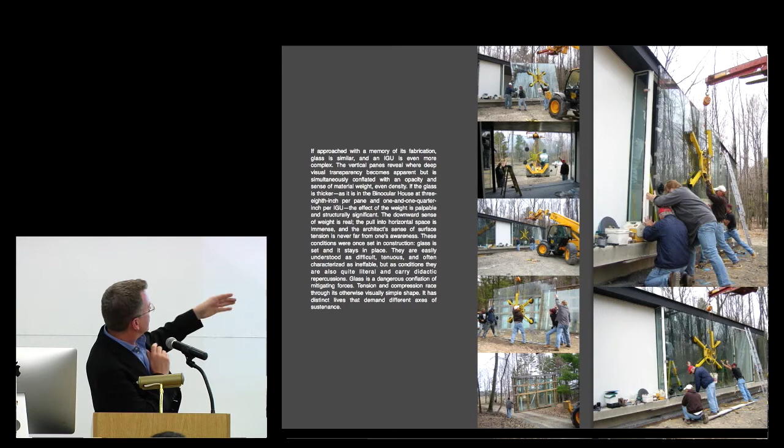And then these 9-foot by 14-foot double plates of 3/8 inch glass in an IGU, about 1,500 pounds each, 9.9 pounds per square foot. All of that going in, of course, in this case with a sophisticated machine, and then structural silicone, just zipping the whole building up. Doing this in the middle of a forest, moving the glass from the road to the site took about an hour per piece of glass because it had to go so slow. And this is the guy doing the silicone work. That's the GC watching him.

And construction. This is a whole other lecture, but the scale of the glass is such that the peripheral vision fades away and starts to bend around you. And ideally, it then pushes you topologically into the landscape. Column detail. And then finally, the Richard Barnes photographs of the final building. Richard used to live here. I feel like Sejima. People say it looks like Philip Johnson. It looks like Mies.

Philip Johnson's glass house, the glass is 3.3 pounds per square foot. It's single lights of glass. It's not tempered. This is 3/8 inch glass. Philip Johnson's is 1/4. This is double. It's got low E coating and it's tempered. It weighs 9.9 pounds per square foot.

And the perimeter of this building is immensely heavy, and all of the glass is suspended 4.5 inches outboard of the building envelope. So on the one facade it's suspended, on the other it's just tucked in. So the effect is the glazing on the right side of the photograph there, you're seeing it stepped a couple inches past the structural wide flange of the building. On the other side, this wide flange.

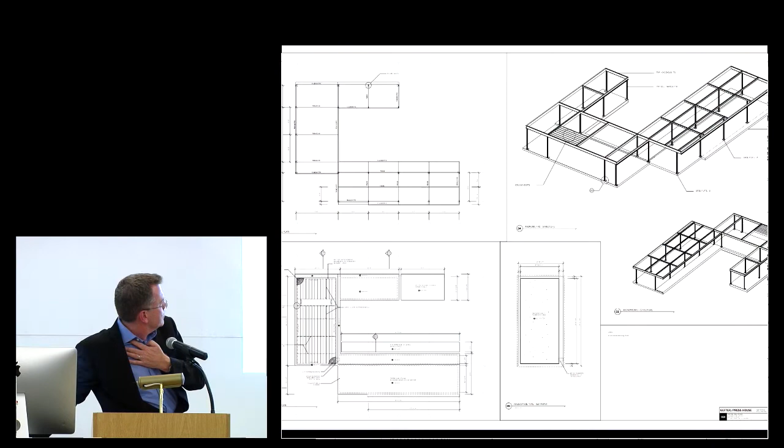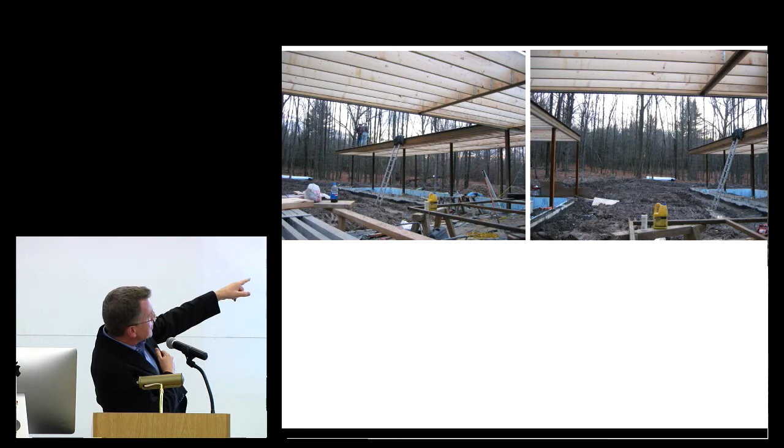When you build a building like this, the columns are bolted into the foundation, but the slab is not in place yet. So that entire building is up on little anchor bolts in space and moving like crazy until you put the slab in. You can see right here.

While this took a tremendously long time to build because the contractor was really pretty much a 2-person show and very, very talented, but not a large scale, we were frequently looking at the building rather than being in it. And there was a kind of joke running along the project that the 2 clients had careers that were obsessed with looking, pictures, art, and that it gave them the patience to constantly be on the outside witnessing it as much as being in it. Eventually, they moved in and have been there for about 6 or 7 years now, and that's the way it looks at this point in time.

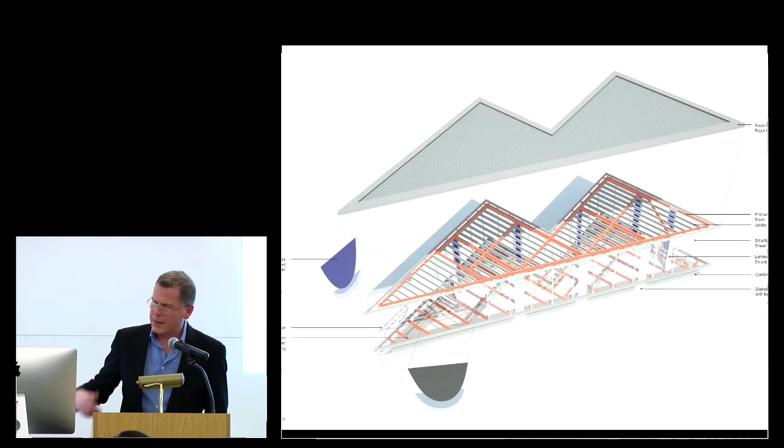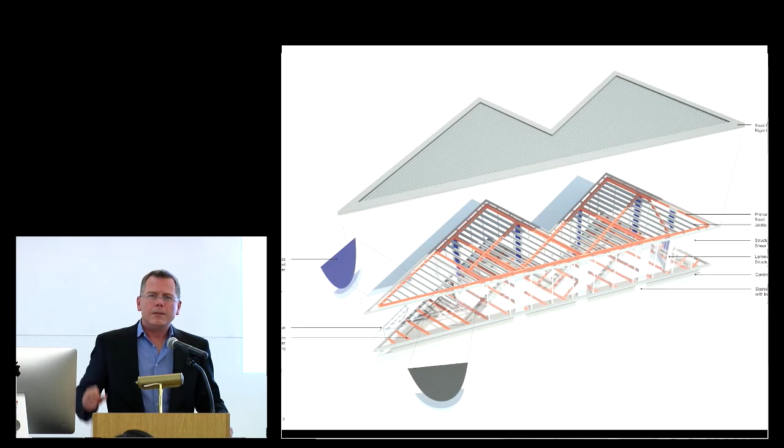I'm going to stop there without explaining something, but those ideas are now getting played out in a small building in Shanghai for a small art gallery on the Huangpu River in a consortium of buildings that includes Yung Ho Chang, Mark Lee, Wang Shu, I forget the other 10, but it's 10 individual galleries being built along the river and that are, in some sense, a derivative of this project.

So in closing, the point I just want to make tonight is that this engineering at a very high level is out there. It's in buildings by Herzog and SANAA and Rem and others. The argument I'm trying to make tonight is that we could find ways in which that comes down and moves through a whole different strata of development. But to do that, somebody is going to have to start working at a very high level of making the economic jumps and the arguments for how that's possible.

We ended up very close with a geographer named Eric Belsky. Eric was until recently the director of the Joint Center for Housing at Harvard, at the GSD and the Kennedy School. He's now at the Federal Reserve in a very high job. But Eric ended up a great friend of the project, arguing that he believes that we are moving to a place where a huge economic transformation will, in fact, not only take place, but it will take place because all of the old asset classes are no longer that attractive as investments.

So banks do not want to hold $7.5 trillion worth of mortgages against bad assets. They will if they have to, and of course, plenty of people could care less. But that history of what housing was is relatively short in the history of settlements. And the 30-year mortgage is relatively recent, and the run-up in debt is relatively recent. So I would just like to think that we as architects are at a moment when, depending on how we phrase the debate and enter it, we can be more influential, I think, than ever.